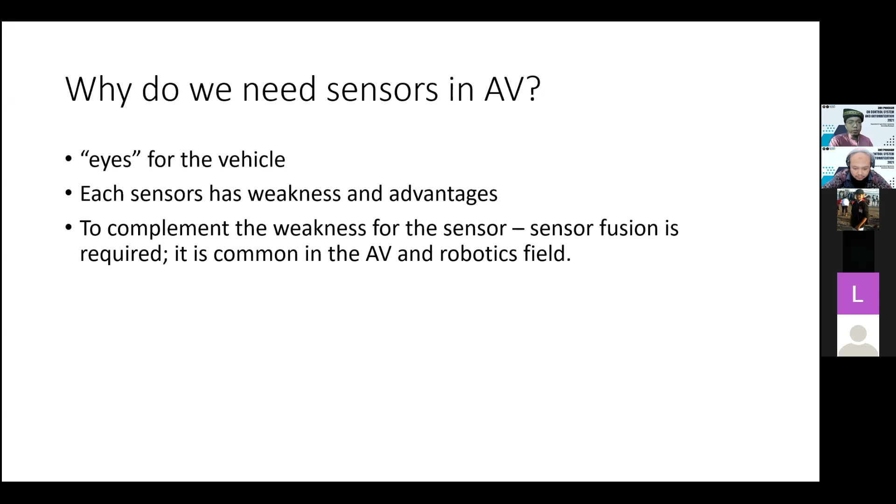So when we are developing our autonomous system, we try to understand the environment. And how we understand the environment is by sensing it with a sensor.

So normally in an autonomous system, we have three parts here. We have perception, we have planning, and we have control. So what is perception? Let me give you one example. Perception is like us humans, right? When we walk, we see through our eyes and we hear through our ears, right? So when we walk, the eyes and the ears try to get the information during walking. And this information is processed by our brain so that we know where we are, where we want to walk, and how we walk.

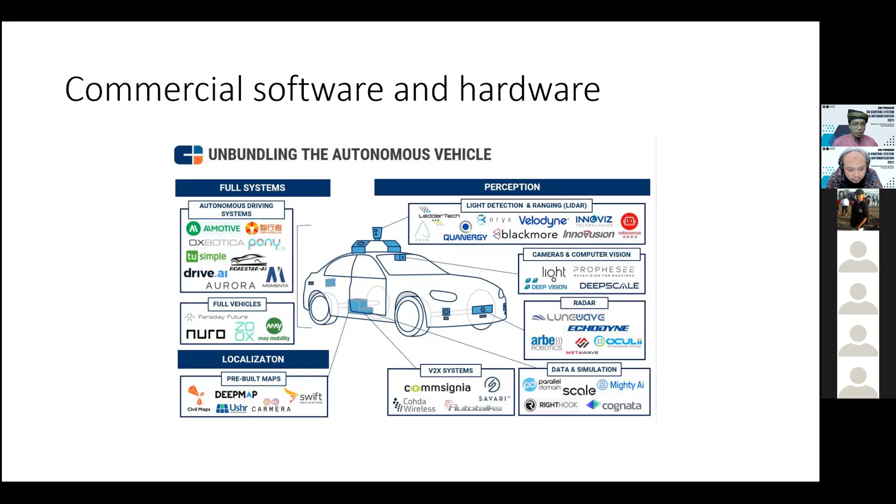And the second approach will be using open source. With open source software, you need to code a bit, you need to understand the coding a bit, but the advantage of open source software is that all the code is free and you can use the code development for your own application. And in fact, you can do commercialization. You can sell your product using open source software. So on the slide here, you can see some of the companies that are trying to sell the commercial software.

And we are going to talk about the sensors and how we use the sensors in our autonomous system. So we are going to talk about LiDAR later, camera, inertial measurement unit, what is the principle of the sensor, the odometer, the GPS, the Leddar, and the last thing is radar. And of course, there will be more sensors used, but these are the most common and mostly used when we want to convert our system into an autonomous vehicle system.

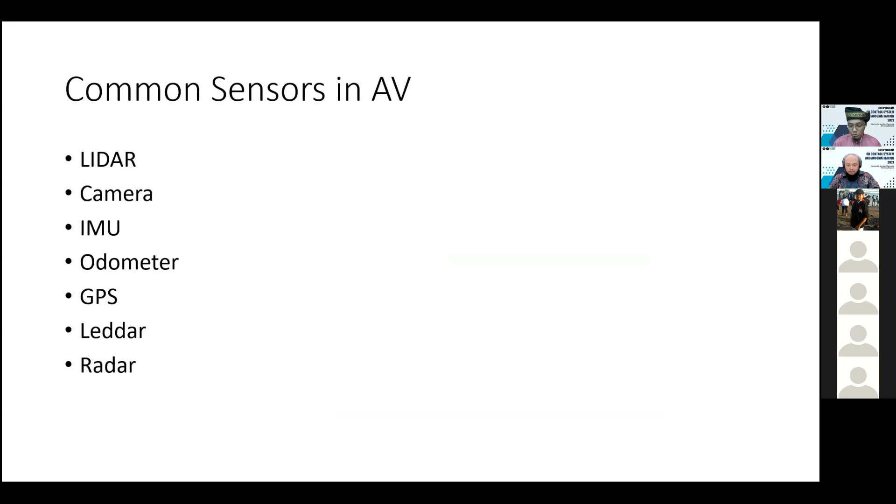So there are two types of LiDAR. We call it 2D LiDAR or 3D LiDAR, where the purpose of the LiDAR is to scan the environment and do the maps. We want to create the map of our environment. The term LiDAR originated from light and radar. That's why we call it LiDAR. LiDAR is commonly used to make high resolution maps. Its applications are surveying, geoinformatics, geography.

You can see laser guidance, and this is the real purpose of the LiDAR before we had autonomous systems. Normally they use it in surveying, for example, in agriculture to scan the topography of the area. And because of the ability of the LiDAR to detect the topography of the area, we utilize this technology in our control system and navigation for the autonomous vehicle.

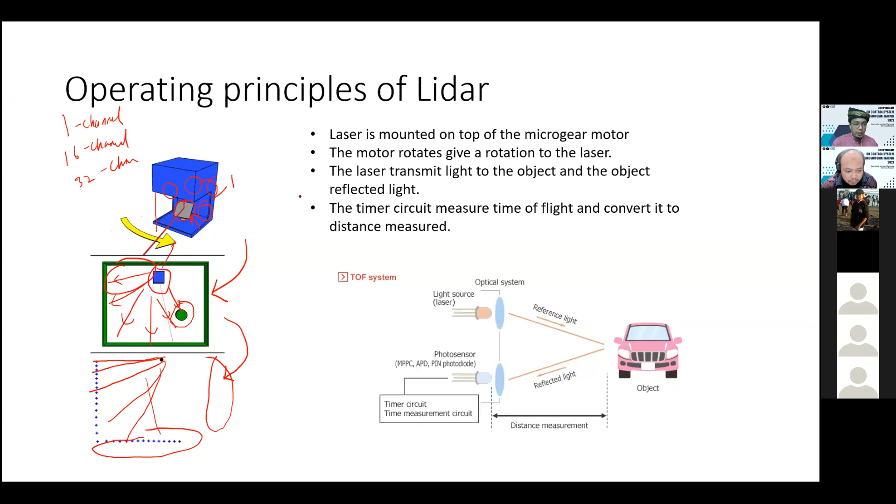Another example is the 3D LiDAR. The 3D LiDAR consists of multiple channels. Normally when we buy a 3D LiDAR, they have 16 channels, 32 channels, or 64 channels, and the highest one is 128 channels. So the higher the number of channels, the more information we can obtain from our sensor, and the more precise the 3D image we can create when we do a scan.

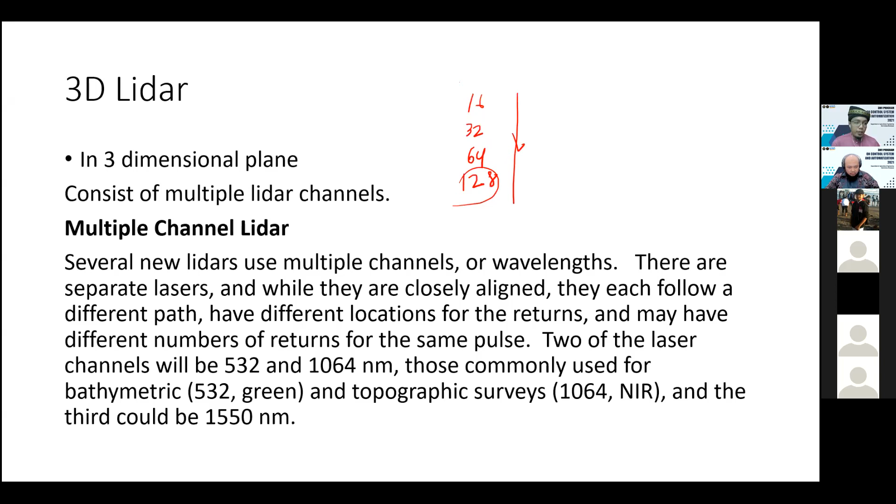And this is, for example, Velodyne, the most famous one in autonomous system development. This is a company from the US that makes 3D LiDAR. And when we have a 3D LiDAR, we can convert it into a 2D LiDAR reading.

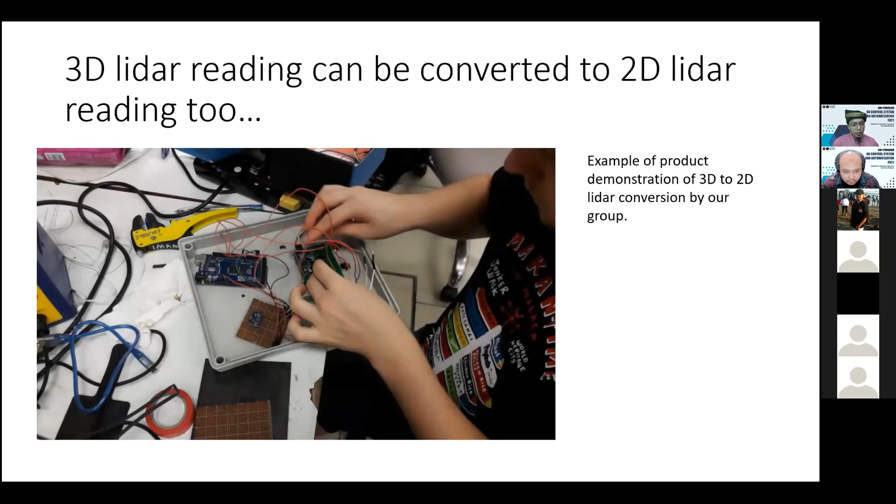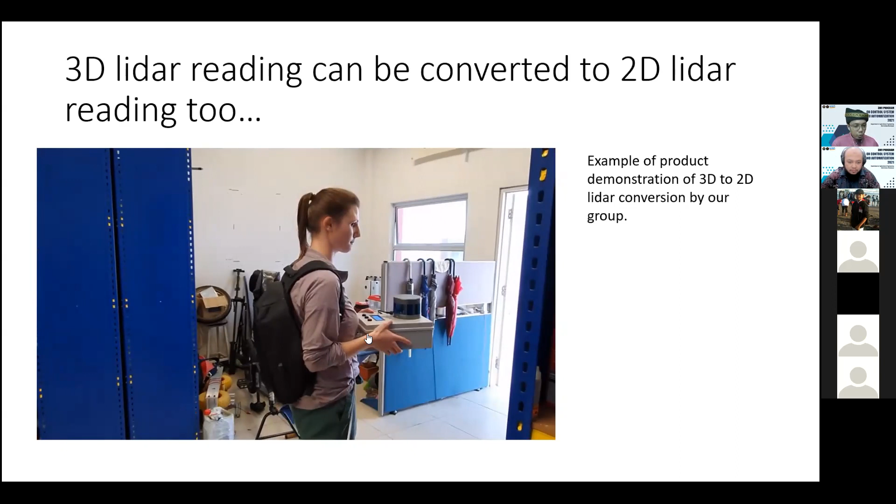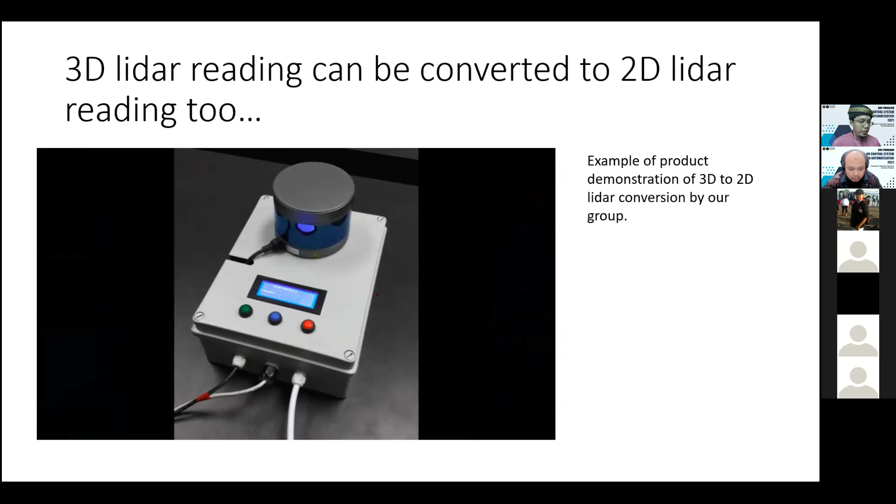So let me show you one of the examples inside my laboratory. We developed a 3D LiDAR application. You can see that the 3D LiDAR is here, and we put it into one small box. Our purpose is to use this 3D LiDAR and generate the 2D format.

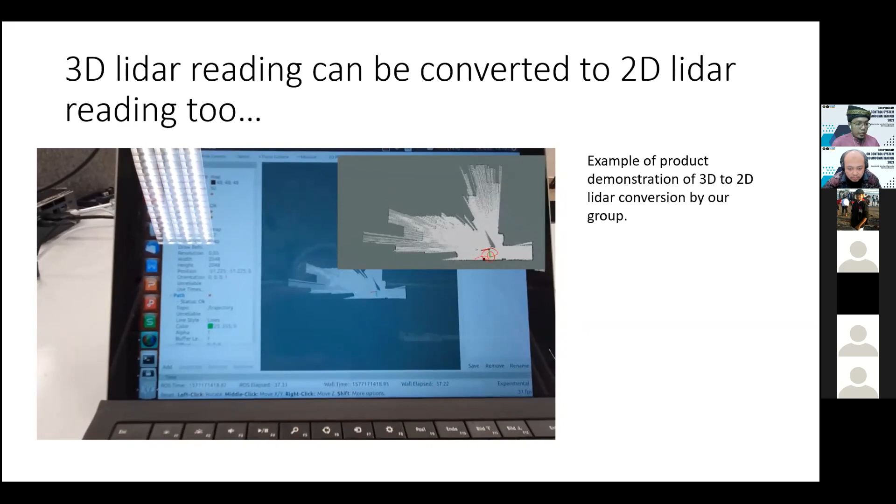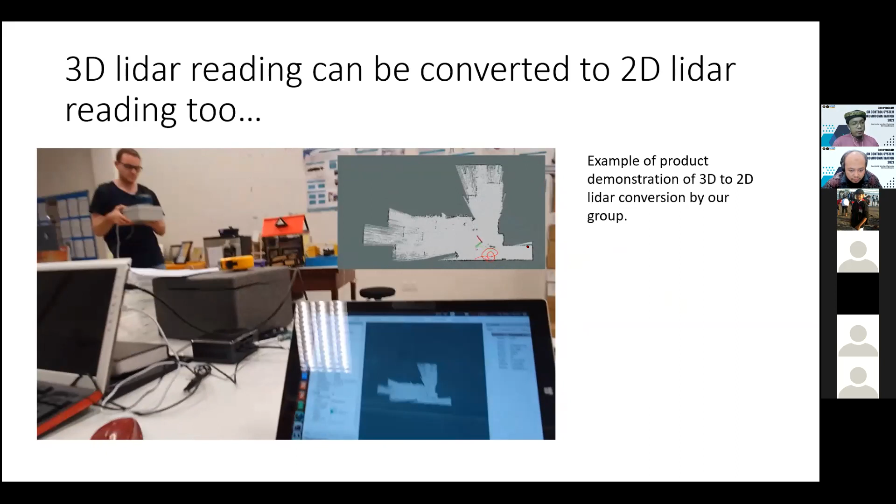So you can see from the video here, we can see on the map in gray color, whenever the person is walking, they can start to scan the environment and generate. We use our algorithm to generate a map of this environment. So we need to walk.

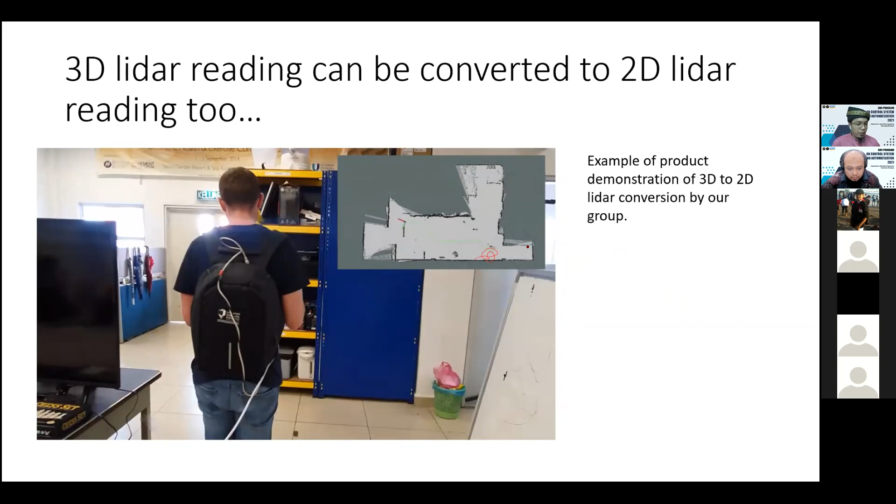So for example, if you see here, we are doing the map inside a building. This is inside our laboratory. When we do this scanning inside the laboratory, we can generate the map inside our building, because we know that inside a building, we cannot use a GPS sensor to generate maps.

So this is an advantage, whereby you don't have to do an actual measurement in order to generate a map. What we do is we just walk along the green trajectory. You can see it here, the green trajectory.

We just walk a short distance and you generate a complete map already. So this is the advantage if we have LiDAR. That's why LiDAR is being used a lot in autonomous systems.

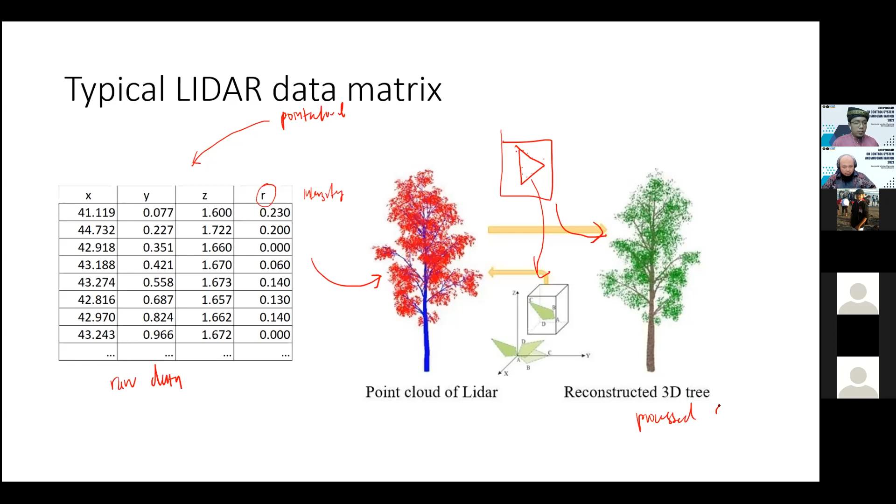So on the left side is the raw data, the information we get from the sensor, and the right side is the processed data. So this is what we get.

And when we have LiDAR, we also have a camera. The camera is one of the sensors that is mostly used in our autonomous vehicle system. Why? Because the camera is very cheap, right?

For example, you can see that the first version of the Tesla vehicle, the commercial autonomous vehicle in the US, didn't use LiDAR at all. They only used what we call a camera and GPS. So it saved a lot of cost because LiDAR is very expensive, and you can get a very cheap camera for less than $100.

You can get a very good camera, and then do image processing for object recognition. The concept of the digital camera is to use an array of millions of tiny light cavities, or photosites, to record an image.

So we have the image sensor. We get the light source here coming to our camera, and the camera traps the image, and this image data is logged into the digital circuit. Normally we have RGB layers, red, green, and blue layer, and we do the image processing.

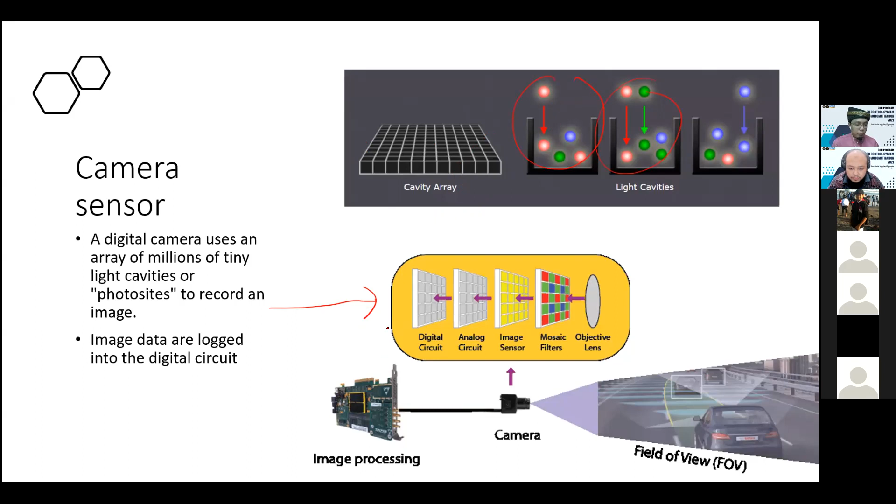Using a camera, we can apply machine learning and artificial intelligence techniques to recognize objects. For example, if we train our image data, we can use it to track motion, such as human motion. When we can do this, we are able to track the image.

So that we can run the control system. For example, if we track a human using a camera sensor, you can stop your vehicle by giving the actuator or throttle command a 0 value so that your robot stops. This is an example of the camera sensor.

Also using a camera, this is widely used in the world right now for image classification. So using a camera, for example, for agriculture, you can detect the plants or trees, or the fruit maturity.

Using image processing, when your vehicle approaches the fruit, you can recognize it and instruct whether your vehicle should go and pick up that fruit or not, using image classification. So this is using a machine learning technique.

If you understand Python, we have machine learning toolboxes like TensorFlow, which you can install using Anaconda. This technique is very useful if you want to develop an intelligent application for the robot you want to build.

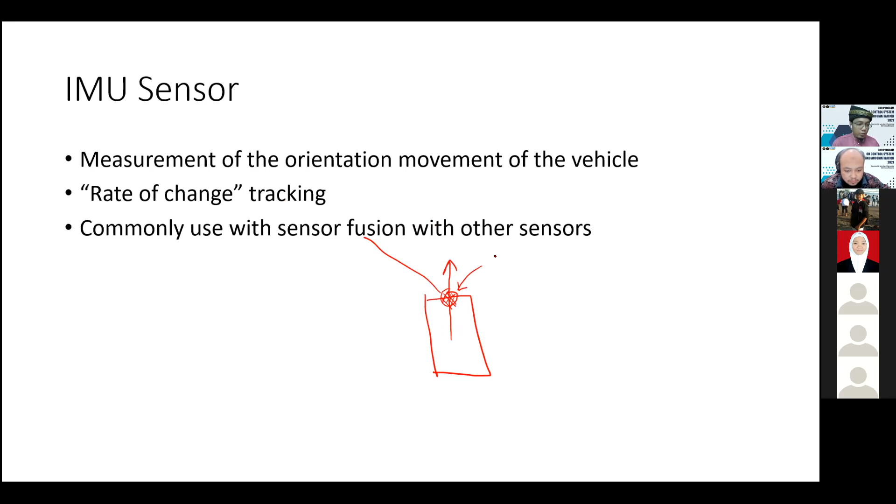Normally in a mobile robot, we try to move forward, and that's why most sensors like LiDAR and the camera are placed in front of the vehicle, because having a sensor in front gives you a very good field of view for scanning.

However, when we want to predict the motion, we want to know how much our vehicle rotates. For example, if I give some steering value to my tire, I want to know what the rotation per second will be - for example, in 1 second, how many degrees my vehicle rotates. Maybe in 1 second my vehicle rotates 1 degree.

So I can predict in 3 seconds where the heading of my vehicle will be. This rate of orientation we call rate of change tracking, meaning you can measure the rate of change in 3 axes: X, Y, Z. When we have this rate of change, we can fuse it with other sensors to detect the overall movement of our vehicle.

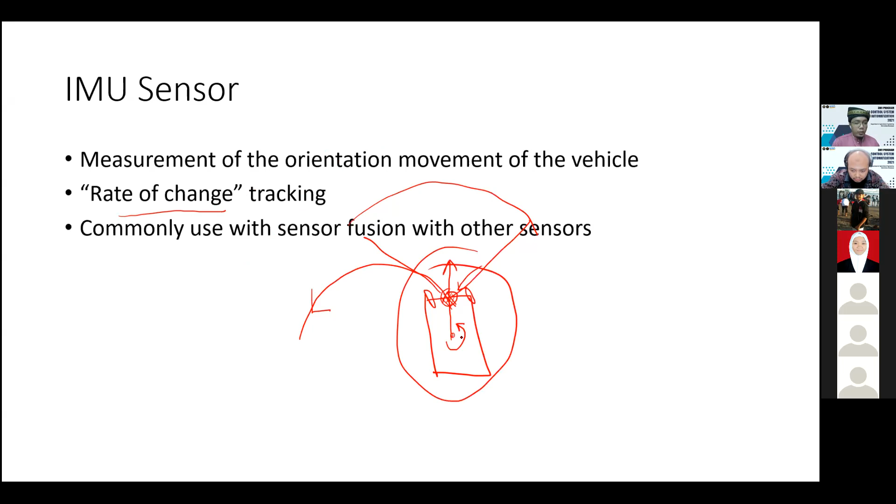This is an example with the IMU sensor installed. If we install the IMU sensor, you can see this is your Z-axis. Normally on the Z-axis we measure the yaw, and on the X-axis we measure the roll axis, which rotates left and right. On the Y-axis you measure the pitch axis of your system.

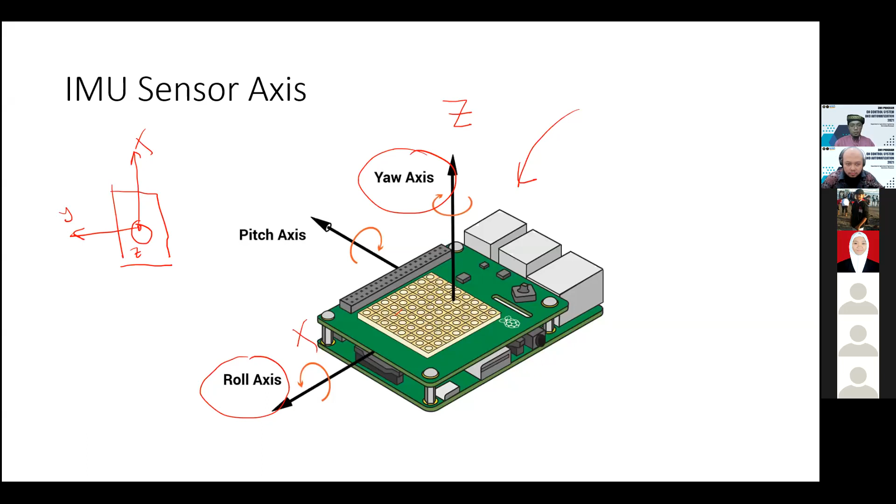Normally when we put our robot here, the Z-axis is pointing outward from the screen, this is your X-axis, and this is your Y-axis, with the Z-axis pointing outward from the screen. This is how we place the sensor in our robotic system.

This shows how we position the IMU sensor. Normally we place the IMU sensor in the middle of the vehicle, or between the two rotating tires. For example, with a left and right tire and your drive here, sometimes we put the IMU sensor at this location, or at this location. The placement of the IMU sensor is very important, because calculations depend on where we put it, so we can calculate the rate of change at different positions. Normally we put it at the center.

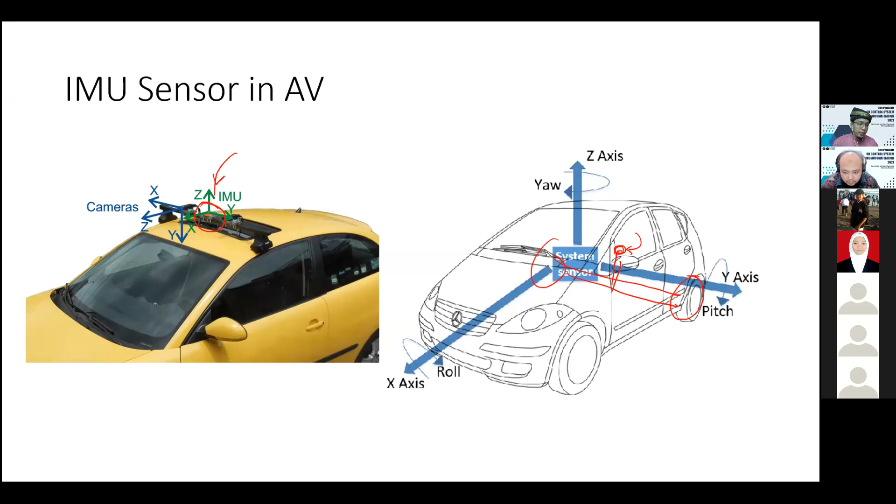And when we put IMU, we can use it for tracking motion detection. For example, using a drone motion, you can have some prediction of the motion involved inside your system.

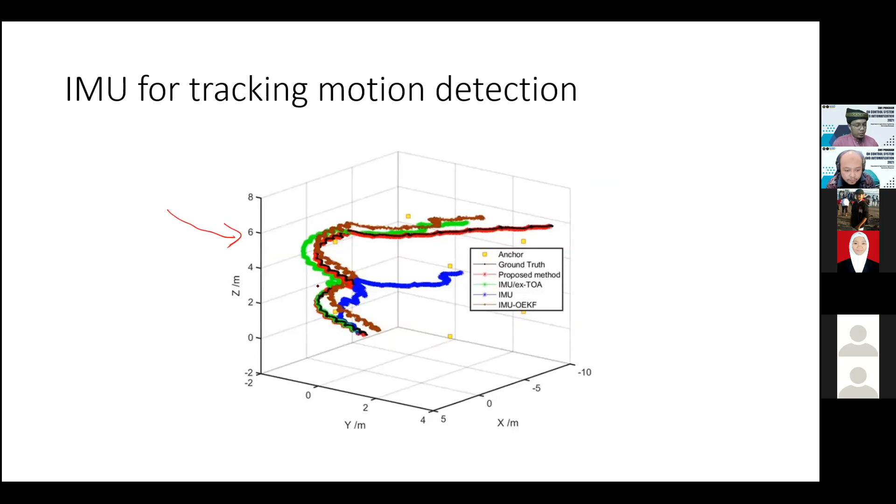And the next sensor is the odometer. The odometer sensor is like IMU, we call it an inertial navigation sensor. It's used to track the trajectory and the distance traveled of the vehicle.

Like the autonomous vehicle, we have IMU at the center. The rate of change of the orientation is measured by the IMU. When you have a rate of change, it means our robot can be detected whether it turns right or left. But normally the IMU is not precise if you want to track for a longer distance of motion.

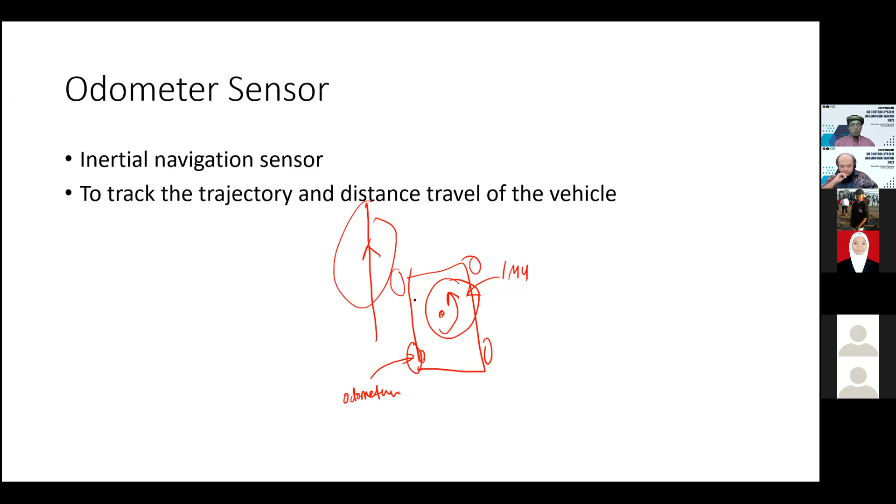That's why whenever we have a tire here, we will install the odometer inside here. So whenever our tire rotates, you can predict the translational motion. When we combine the translational motion and the orientation motion, you can generate or predict where your vehicle is moving.

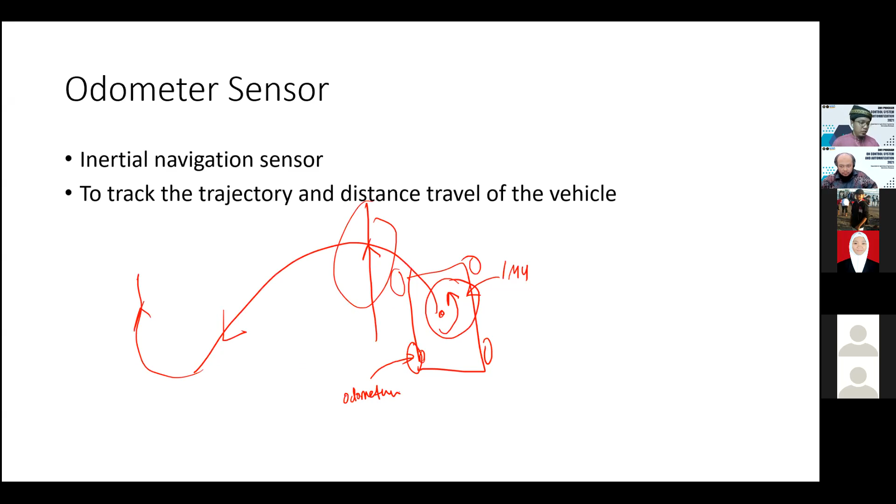That's why we call sensor fusion very important in the autonomous mobile robot. That's why we use a lot of sensors in order to get where our vehicle is moving. When we combine these, we can fuse with other sensors to create the motion here.

For example, you can see the black line here is the reference. The reference is that we want to follow this line. This is our robot. So when we use the IMU and odometer, we can plot the red color one.

This red color can be plotted using the IMU and odometer, so that you know we want to go to the black line, but our current line is on the red. And we can calculate what is the error between the red line and the black line.

And if we have good tracking, you can see here that the red color line and the black color line are very close. So what we can say is the smaller the deviation between the black and red color line, the higher the accuracy of our robot to follow our trajectory.

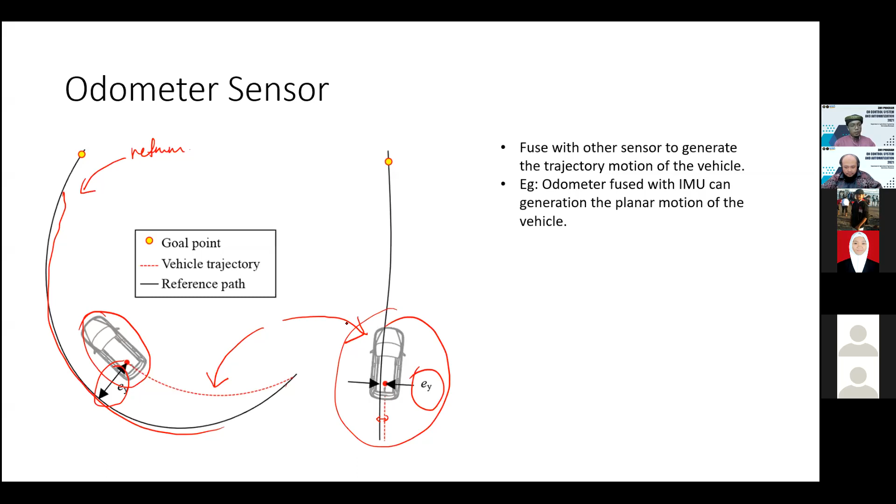That is why we need the trajectory information of our vehicle, so we can compare where we want to go. If we have a smaller error here, it means we are on a good track, so your vehicle is currently following the path that you want your robot to go. This is important because we want to make sure we are following our path.

And the next one is the GPS sensor, global positioning system. This is to get a global localization sensor. So if you see from the previous slide, in order to get the X and Y position in our coordinate, we fuse between IMU plus odometer.

We fuse between the IMU plus odometer to get the XY coordinate of our robot. For GPS, if you don't fuse with any IMU odometer, you still be able to get the X and Y coordinate. That's why we call the GPS a global localization sensor.

So the advantage of the GPS sensor is that GPS does not have biasing error. We will discuss later what is the biasing error compared to the inertial measurement unit. This sensor has some noise, which we will see later. GPS does not have this noise.

However, the GPS is very sensitive to the environment, because the way GPS communicates is via satellite triangulation to get the location of X and Y. And if the triangulation is not accurate, for example during a measurement at certain locations where you don't have a good satellite number, the triangulation is not accurate. So we will have very low accuracy of our sensor.

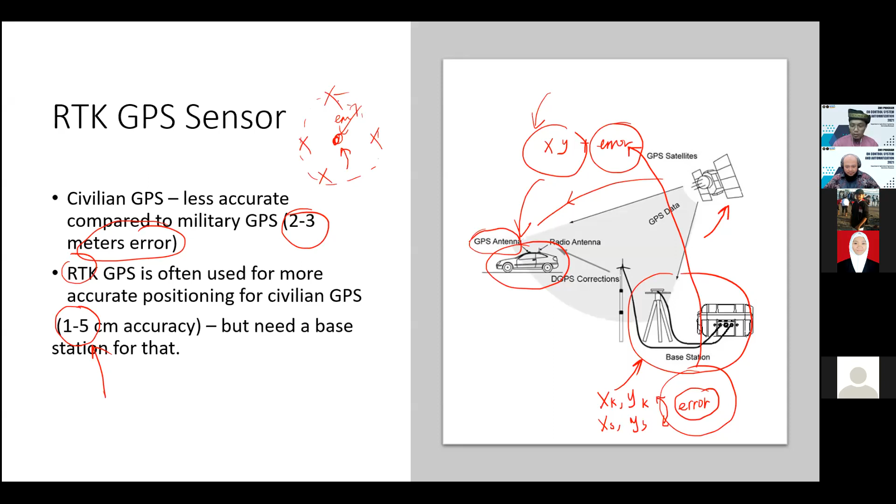So for certain applications, for a known environment in a certain place, we can use RTK GPS because our robot is navigating within that area only. But if you want your robot to cover a very dynamic location, a very random location, we cannot rely on RTK GPS. So there are pros and cons depending on your application.

And the next sensor is the radar sensor, which we use for obstacle or movement detection. A radar sensor is a very fast sensor. It keeps scanning, and radar sensors are categorized based on frequency. So we have high frequency radar and low frequency radar, and we put the radar on our vehicle at a certain angle so that it is used to detect the blind spot and objects passing through, so that we can do appropriate control for our system.

So this is some of the autonomous vehicle technology with LiDAR. They still use the same laser transmission, but with a small form factor, and they can do a scanning. So normally we will use a LiDAR for scanning in a very short distance. Okay, so right now we have been through the basics on the sensors that are being used a lot in the environment.

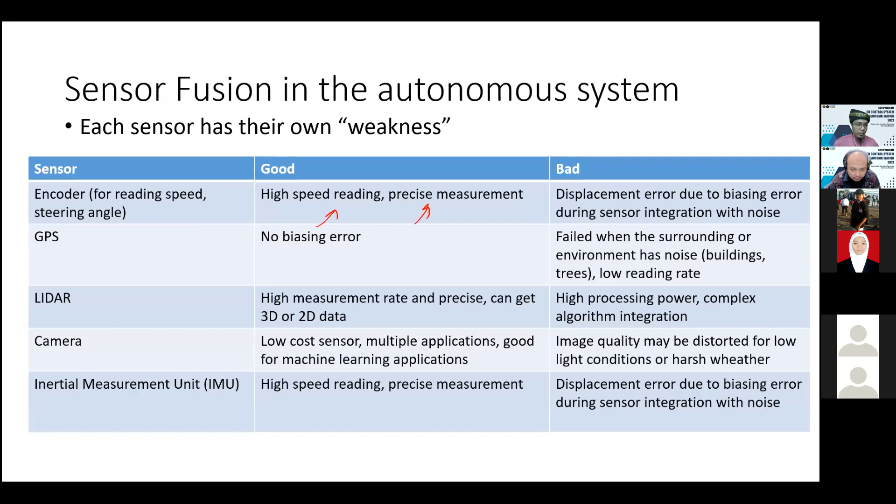For example, you're just going to use it during the daytime only. So maybe you just need a camera and several sensors only. Or we only need it on a small scale only, so we don't need to use GPS. Relying on our encoder is also enough. So it depends on your application, and then the application will determine how you configure the architecture of your autonomous system.

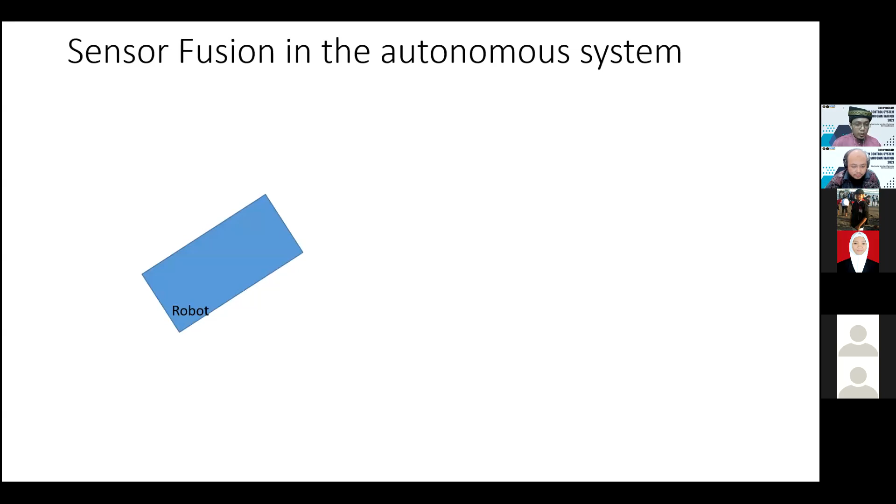So next, I'm going to introduce a basic overview of sensor fusion in the autonomous system. So what is sensor fusion? For example, this is your robot, right? When we want to track our robot, this is actually your actual robot location. This is the location of our robot that we see with our eyes. But when we sense it via sensor, we don't really get this location.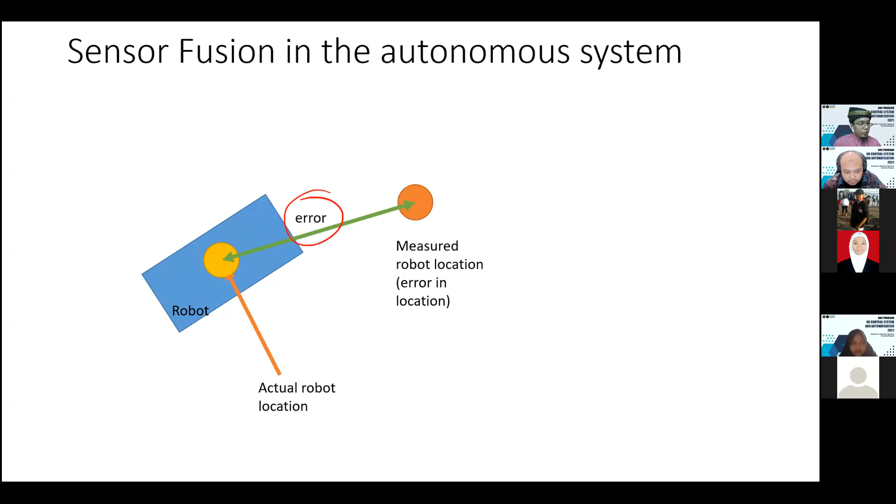We get another location. So the difference between the location that we get from our sensor and our robot, we can say that we have error over here, right? Sometimes when we get raw data from our sensor, the error is very high. That's why we need to fuse the sensor using information from other sensors to verify the actual location so that we can do a correction.

So the process of using multiple sensors is called sensor fusion, whereby the objective is trying to achieve a corrected measurement. So this is our initial sensor that we measured.

This is our actual robot location. And this is the actual location after we do a sensor fusion technique. And we can see that although there will be error, the error is reduced and as close as possible to the actual robot's location. So this is the purpose of why we want to use sensor fusion for our robot.

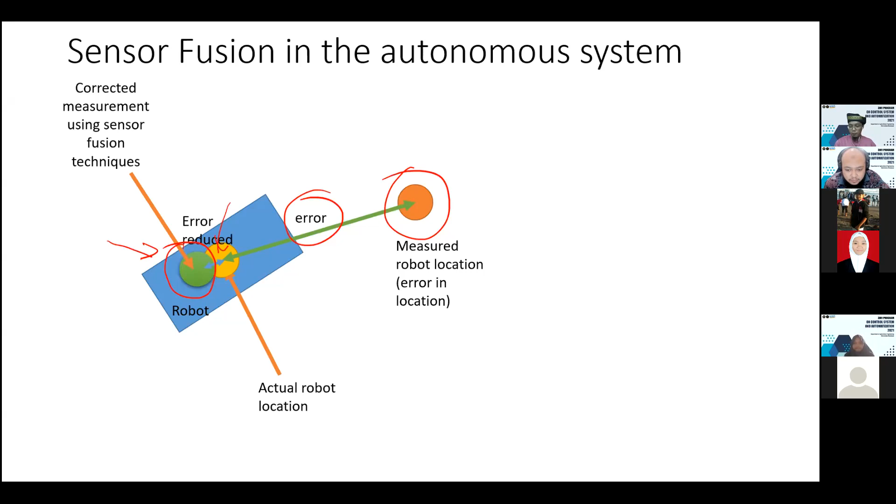For example, if we read the encoder speed, normally we get a theta dot. Theta dot is our encoder speed. When we want to get how far our robot has traveled, the displacement data, we can do the integration. So you do the integration in your programming, where you get the total displacement plus noise. So this is the error.

If we repeat the same loop every time we do the integration to get the displacement data, you can see that the noise will keep adding. We keep adding noise every iteration. So the value of noise here will become larger. This noise we call a biasing error. If we plot it over time, your noise will rise exponentially.

So that's why with an encoder, odometer, or IMU, for example, if our robot is trying to navigate in a perfect circle, when we measure by sensor you don't get a perfect circle, you get something like this because of the noise from your sensor reading. So we want to correct this noise by using sensor fusion.

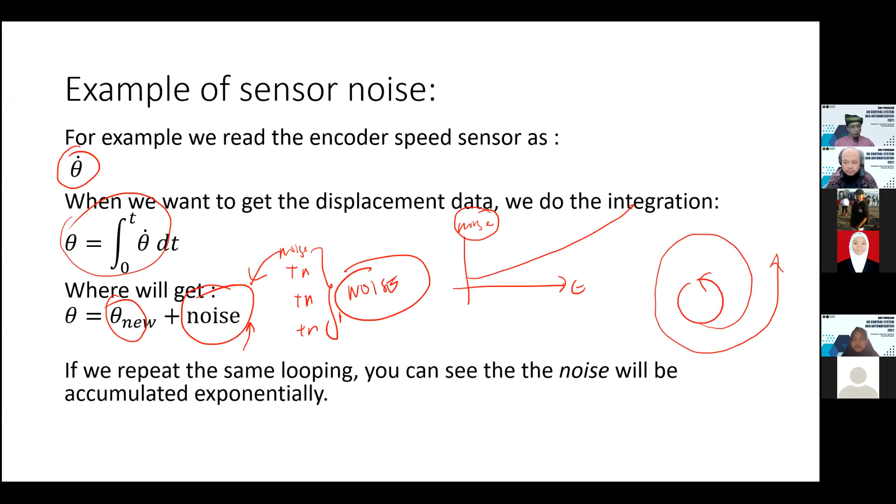Okay, so I'll show you an example of how we do sensor fusion in my lab. We use this small mobile robot, which has an odometer. We have an encoder or odometer sensor on the left and right tires. And we don't use a camera, we use an ultrasonic sensor. You can see the ultrasonic reading over here. So we use two sensors.

The odometer is an inertial-based sensor, meaning it has a biasing error, and the ultrasonic sensor is a non-inertial-based sensor. We use it like a radar sensor to get a distance. The way we do sensor fusion is we try to find a landmark, so that when we get a landmark, we provide a correction to our odometer reading.

In this stage, we use a technique called the Kalman filter. It's an algorithm implementation for sensor fusion. I don't want to go into detail here, but I'll give you an overview. It has two stages, predict and update, where in the predict stage we use the kinematics of the robot to predict the state estimate of our robot.

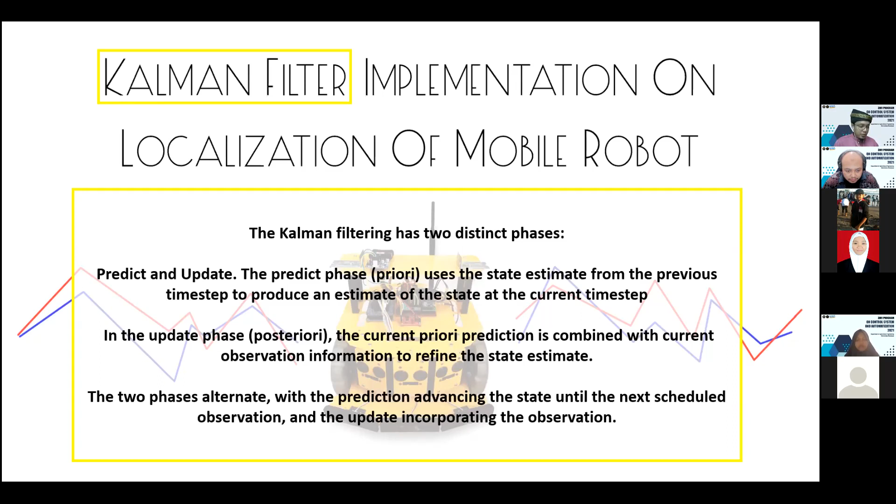We try to predict where the next state will be, and then update it. In the update, we compare what we predict and what we measure from the sensor. Using this error, we correct our robot's location. There are equations, but I won't cover them because they're quite detailed. But this is how we do it: two alternating phases, predict, update, predict, update, until you get a very precise localization from the sensor data.

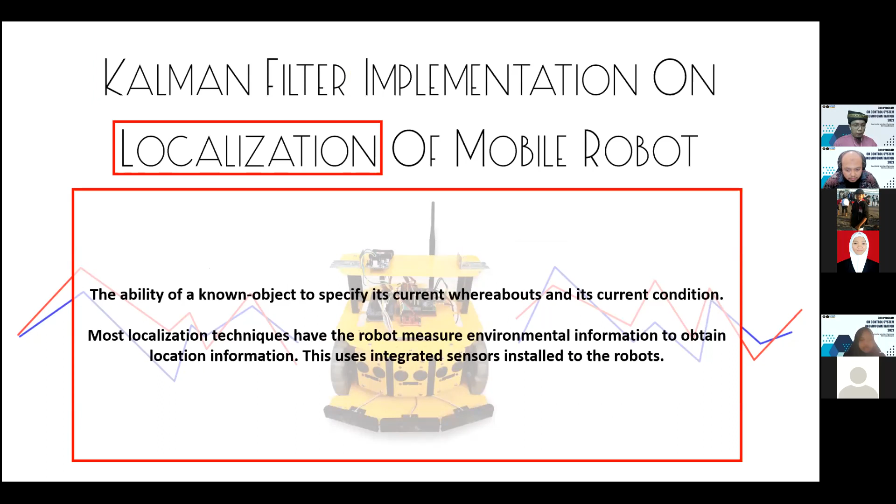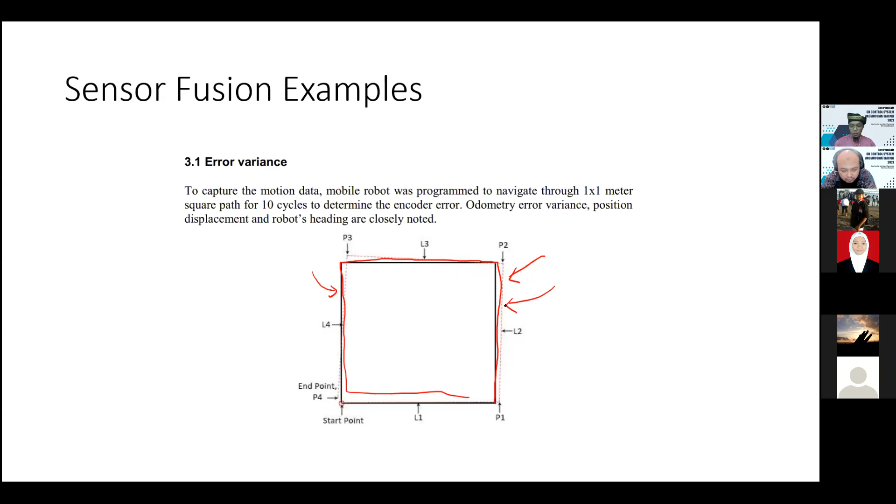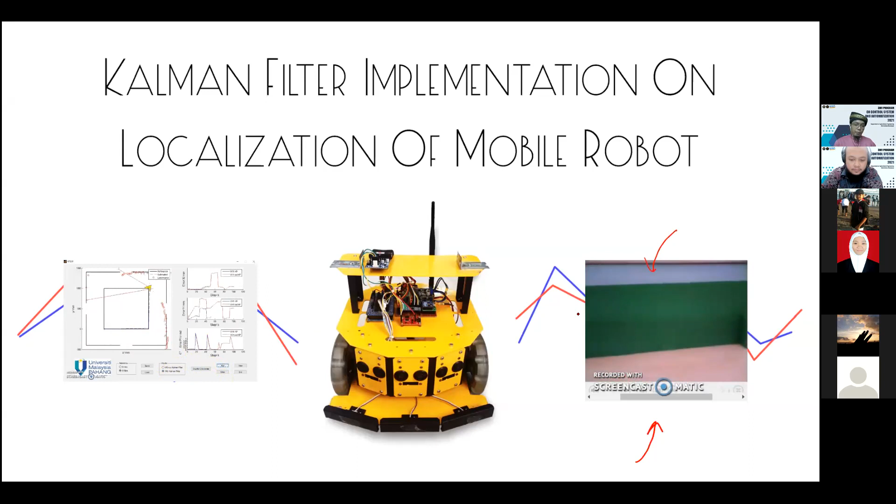How we do it: you can see on the right camera here, we move our robot manually in a perfect square. The green, or black, here is our landmark. We use this landmark to measure our distance from it using the ultrasonic sensor. And we compare what the error is if we don't do sensor fusion, and what happens if we have sensor fusion. So this is the example.

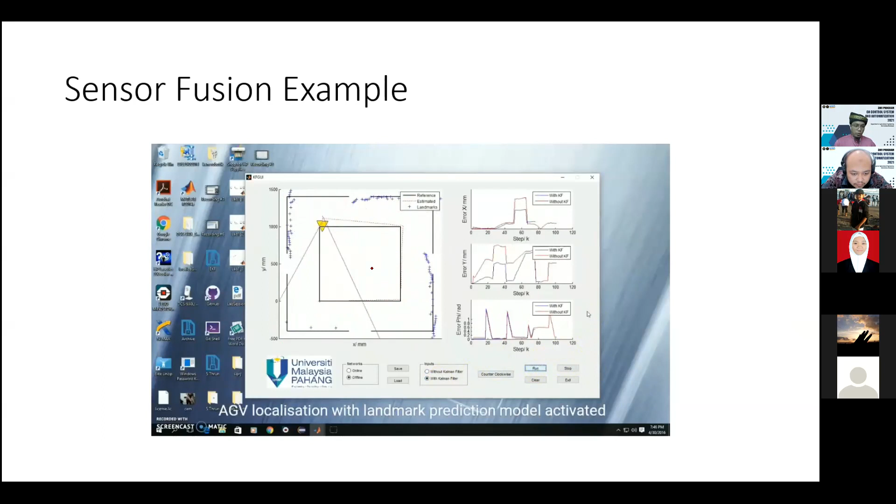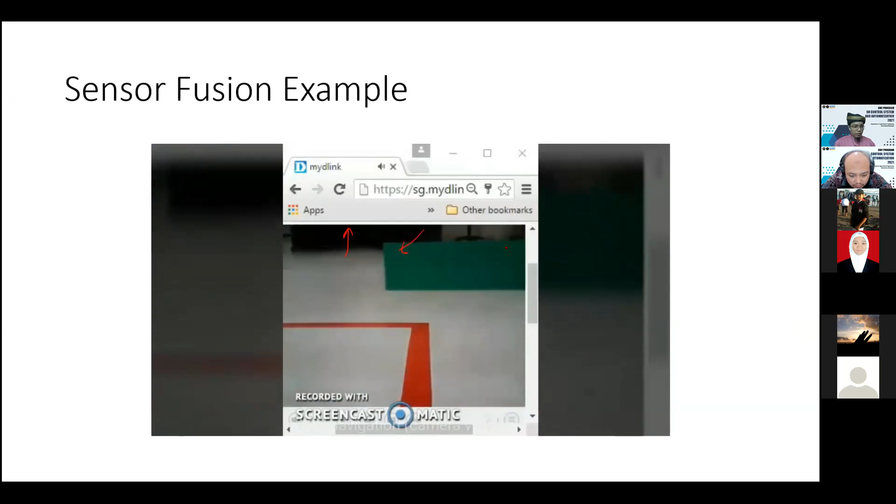So this is the camera view that we have for our robot. So this is the sensor fusion example for our robot.

So any question before we proceed to the next topic? Is there any question? You can ask directly. I see no question in chat. Okay, no question in chat. One question from chat. Okay.

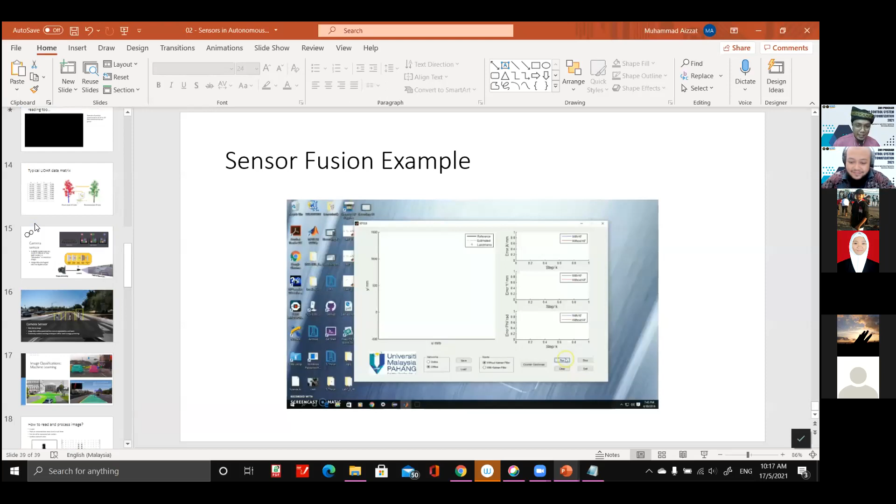From Andika Ananda: I'd like to ask something about the LiDAR itself. How could it read back and receive the data from the laser that is being transmitted? Does it have the same system that is used in a sonar, or is it way different? Time of flight, maybe. Okay, let me open this slide first. Thank you for the question, Andika.

So the principle of LiDAR is we use light reflection, whereas in sonar you use ultrasonic reflection. In sonar you use wave transmission: we transmit the wave and the wave reflects back. But for the LiDAR we use one single light source, and this single light is reflected back to what we call a photosensor. So one is using light, one is using wave. These are two different working principles.

That's why using a LiDAR you can achieve point-based accuracy. Because with every light you have a very precise point compared to the sonar. Sonar is like a wave, which gives a general estimate of the distance. With LiDAR, at every degree of angle you can have every point. So this is the difference between the LiDAR and the sonar. I hope that I answered your question.

Okay, thank you Andika Ananda for the question, and Dr. Aizzat. Okay. Is there any other question? You can ask directly. If there's no question, I want to ask some question, actually.

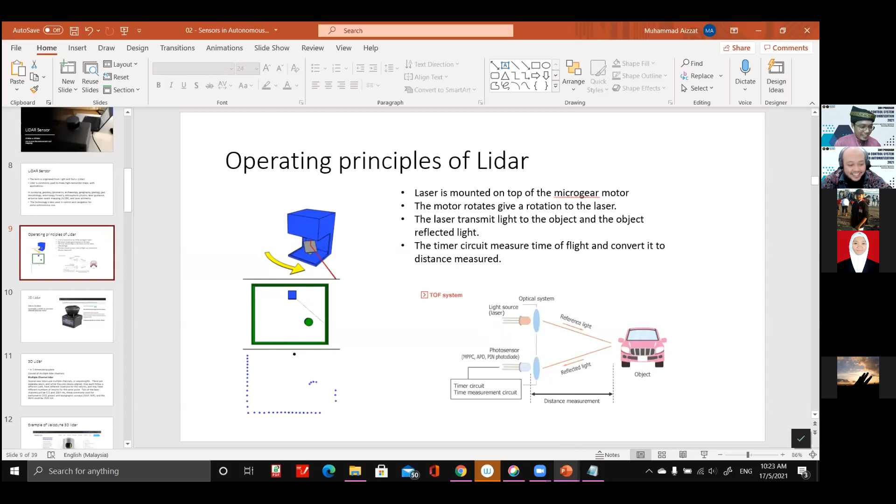I see. Thank you very much, Doctor. I hope that we here can purchase LiDAR soon, so we can try by ourselves. Yeah. You can try it first.

Thank you. Okay. So maybe I will share some case study after the sensor. How do we use our sensor? Okay, in this case study, in the previous lecture you saw that we developed the sensor from a golf cart, right? And then until we developed using our actual car, for example, a Proton car. In this slide, I'm going to share my current research development in UMP.

We try to develop another project which is called Smart Campus Autonomous Vehicle, or the short name is SCAV. In my lab, we call it Autonomous Vehicle Laboratory. In this slide, I'm going to share some of the sensors that we use and some of the development phases that we experienced. Maybe not everything is sweet, right? We have some failures also. So we are going to share this one. So maybe from your side, Dr. Dimas, you can utilize our experience and share with your students so that we can have a good collaboration in the future. So this is the slide on how we start.

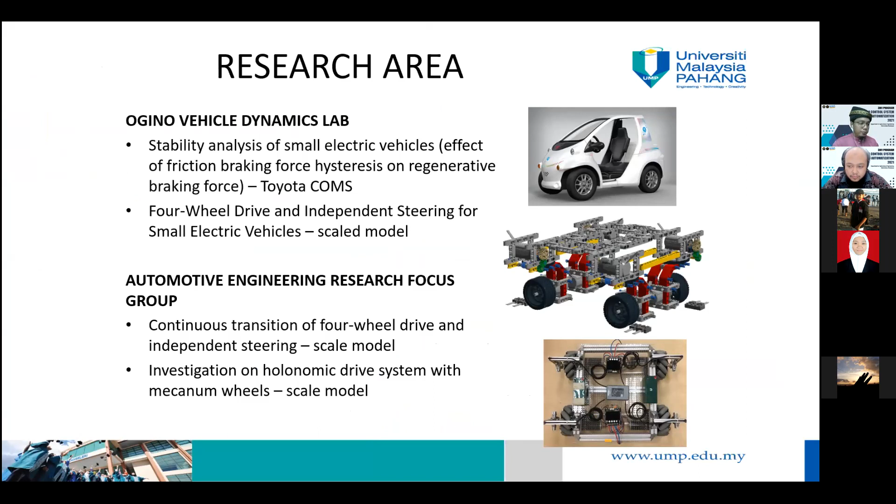The reason I'm telling you this is that when we want to develop this kind of project, we need to have a good team composition, because a very large project is not just one single field. We will have multiple fields. Maybe we need experts in mechanical, programming, image processing. But everyone needs to understand the general architecture of the autonomous system, like I showed in the first slide, so that everyone understands their own role when we do the sensor integration.

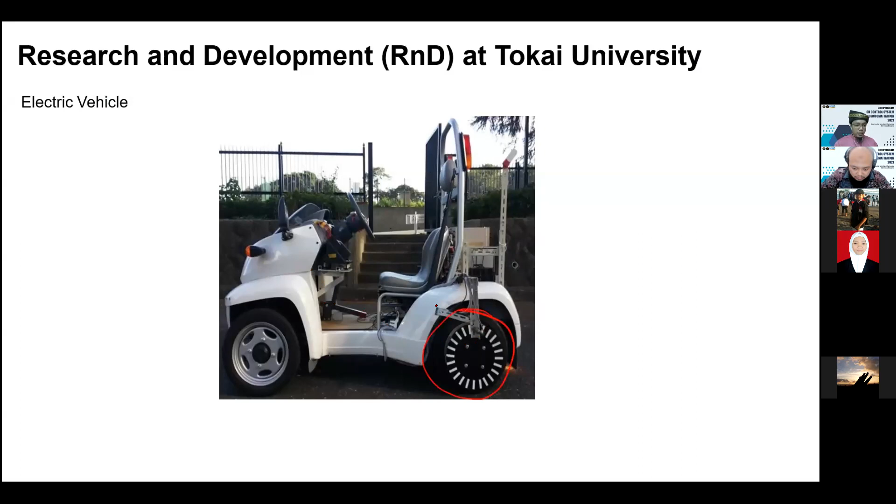So this is some history on how we started. When we wanted to start this bus development, we started with small things first. My previous researcher, Dr. Hewan from Japan, developed a golf cart. We installed the golf cart with, for example, an odometer here and some electric vehicle sensors. And also we did a lot of benchmarking. We went to some industry. I went myself to the autonomous vehicle test track of Volvo in Sweden. They call it AstaZero. This is the first autonomous vehicle testing track in the world.

So here you can see there is a dummy building, and this is an autonomous truck being passed through to see the junction. This is the autonomous Volvo here in development.

I did test it, I became a passenger to test some of the latest technology. It's a very good experience, and they have a junction with some dummy kind of thing to check the intelligent monitoring system.

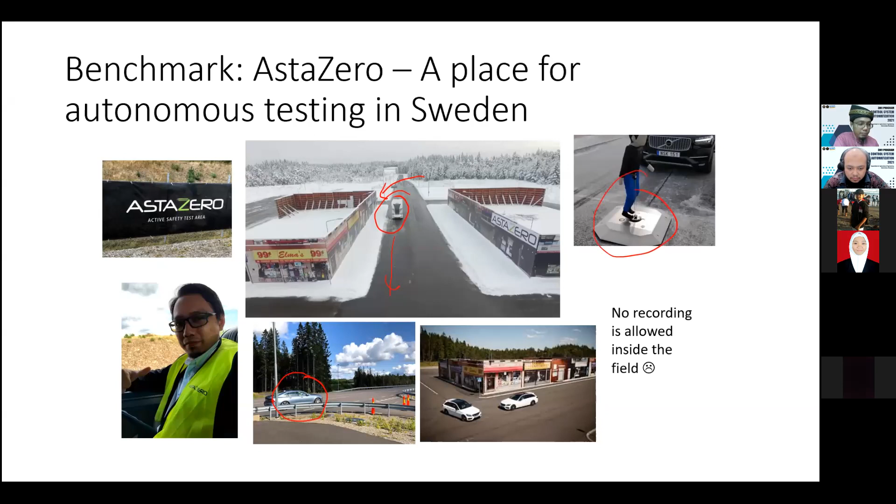We went to Sweden for benchmarking. Some of this autonomous platform is being developed by a French company, and they deploy it for awareness at Sweden's Chalmers University campus. It's like a very compact shuttle.

You can go inside the shuttle, and there will be one AV engineer inside just to set up the systems. Then you can try it for free for navigation around the campus, so you see a nice experience where you see how the autonomous vehicle works.

We can see that they are more advanced because, of course, they have plenty of budget. When we want to develop this kind of project, it involves a lot of money, so if we have a lot of money, I think we can do the same. They are sponsored a lot by very big automotive companies like Volvo, Volkswagen in Europe, so that's why they have a lot of funding. I'm quite impressed when I went there compared to our country, we have a very limited budget.

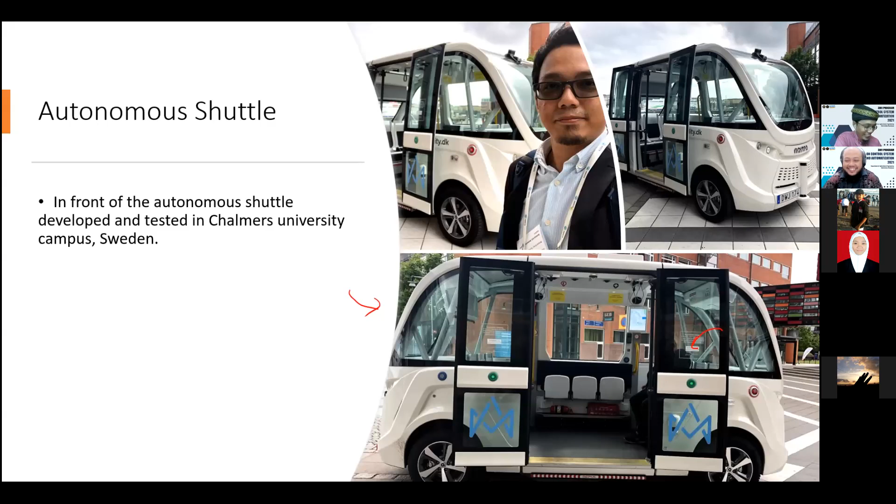He is one of the principal researchers responsible for developing this kind of algorithm for the autonomous vehicle. You can see they have a very sleek profile, very sleek manufacturing, of course again because of the budget. It's very good to know that we have a representative from an ASEAN country involved in this very big project, and we have collaborated to produce some books and papers in the autonomous vehicle field.

In 2015, me and my friends started with AV development. Of course, we started with a small platform first, so as I shared previously at the PhD level, I also started with RC car. RC car or drone is a good platform for students to start because it's not that expensive, I think your university can fund it.

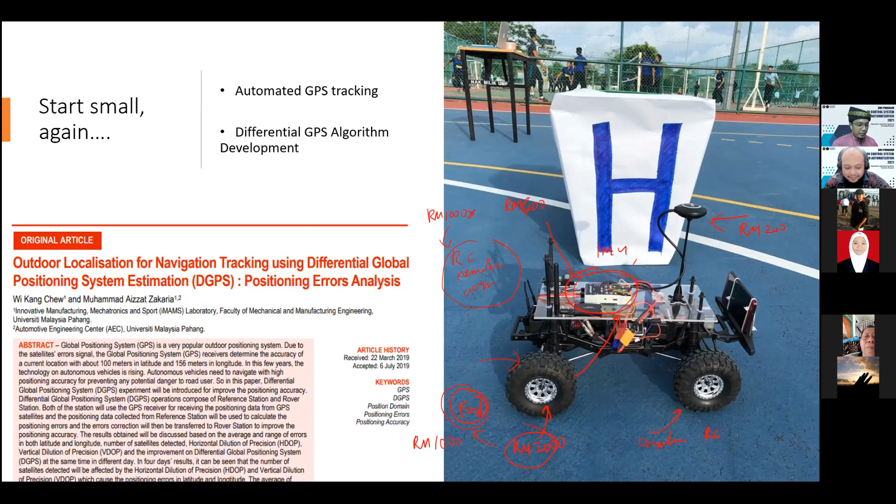So that's why we use this crawler for testing. In fact, you can put a very cheap, low cost setup, or you can just use a Raspberry Pi if you want to do some image processing. This is just an example of how to start cheap.

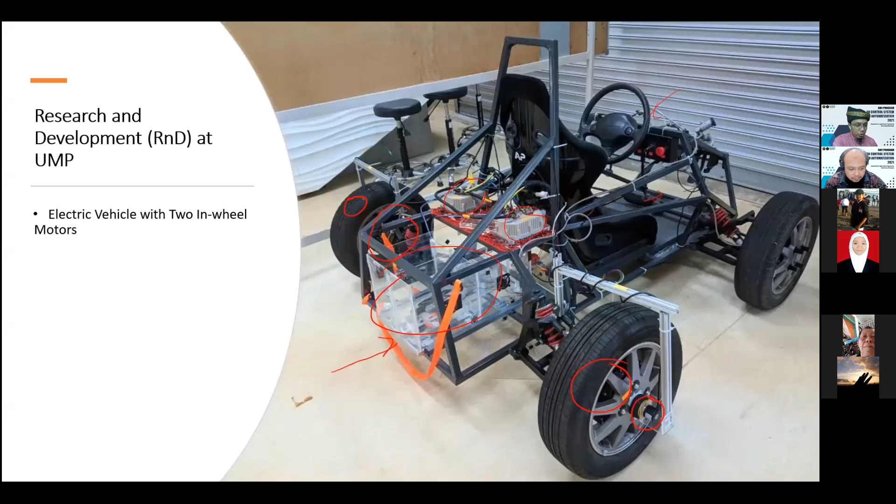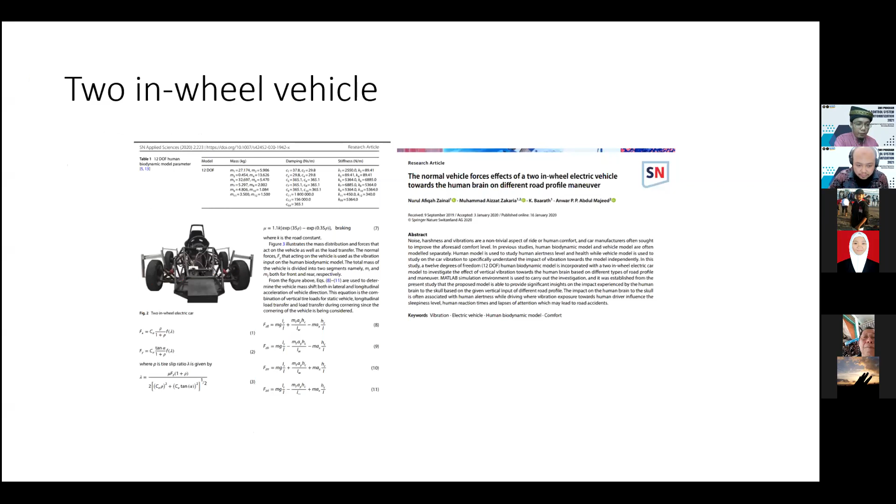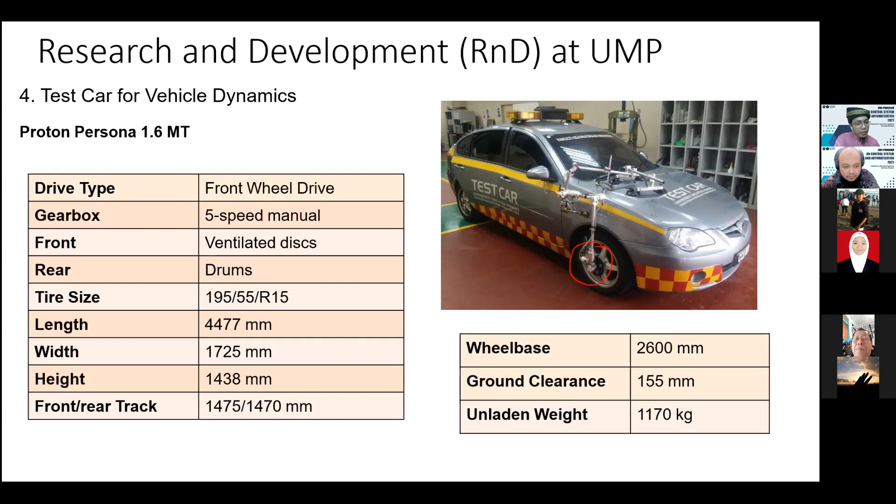So we developed this for our research and published some papers. We have some mathematical modeling where we verify it, and we also developed a test car inside our university using a Proton Persona platform, where we put some sensors inside. We have some instrumentation, but the difference is we don't put a motor as the actuator to control it - this is more of a data logger only, used to measure, estimate, and see the dynamic characteristics of our vehicle.

And this is also a cheap cost option if you want to develop it yourself.

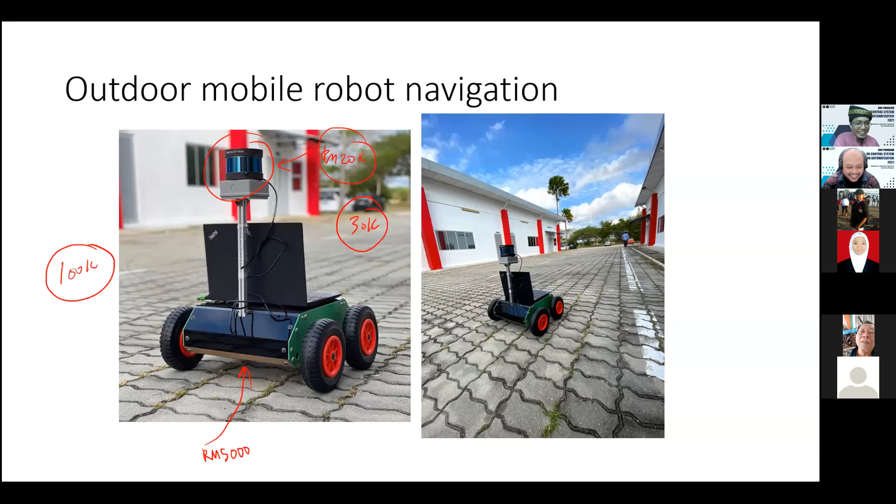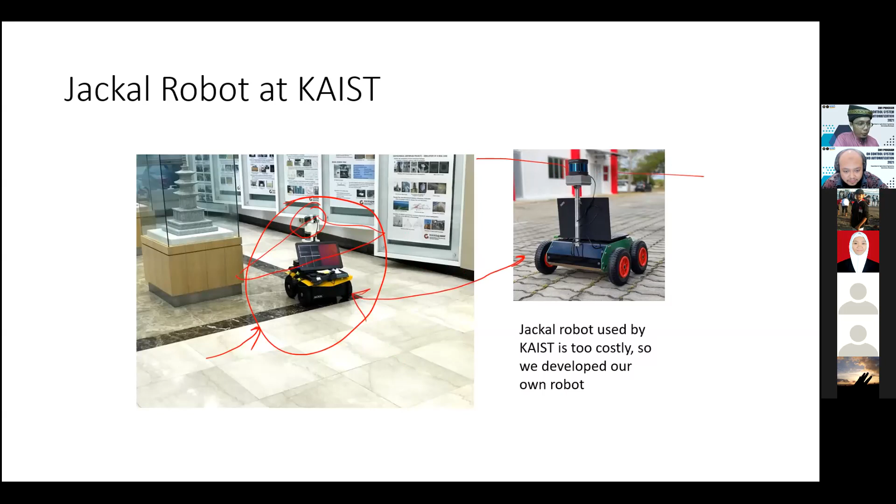This is some sharing on Sweden, where they have a very complete solution at their campus. The landscape already implements EV architecture, compared to our country where we rely a lot on petroleum - our profit comes from, for example in Malaysia, Petronas, like Dr. Dimas who also studied at Petronas. So we rely a lot on normal gasoline fuel, that's why we have much less electric infrastructure in Malaysia.

But in Europe they're already matured. That's why when EVs are already almost everywhere, they accelerate towards autonomous systems. You can see inside the university there are logos showing industry support from very big companies. So they have funding not only from government but also from industry. In fact when we went to our conference in Sweden, the major sponsor was Volvo.

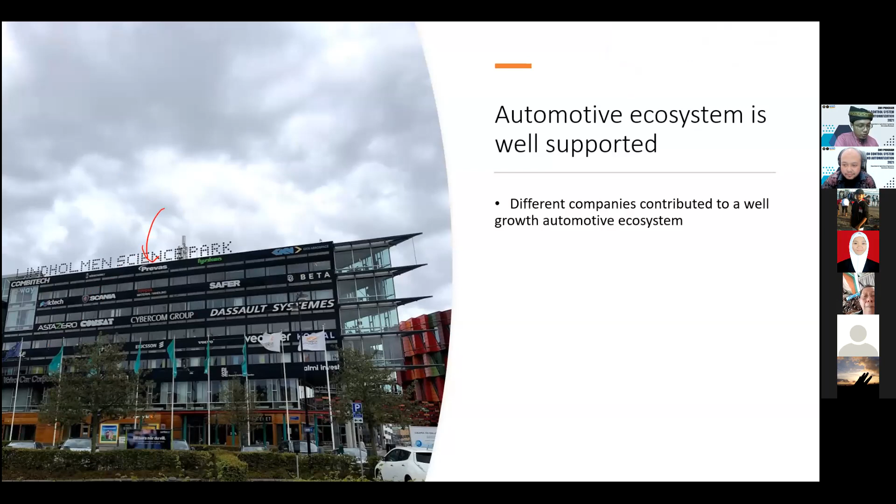In our ASEAN region, our participation in autonomous vehicles is very small. For example in this Europe conference, only me presenting from Malaysia. I hope Dr. Dimas can venture into Indonesia so we can create Indonesian participation there, so we can collaborate on creating an ASEAN region conference for this topic. We are very small - this is the truth, we as ASEAN have to collaborate more to expedite our technology.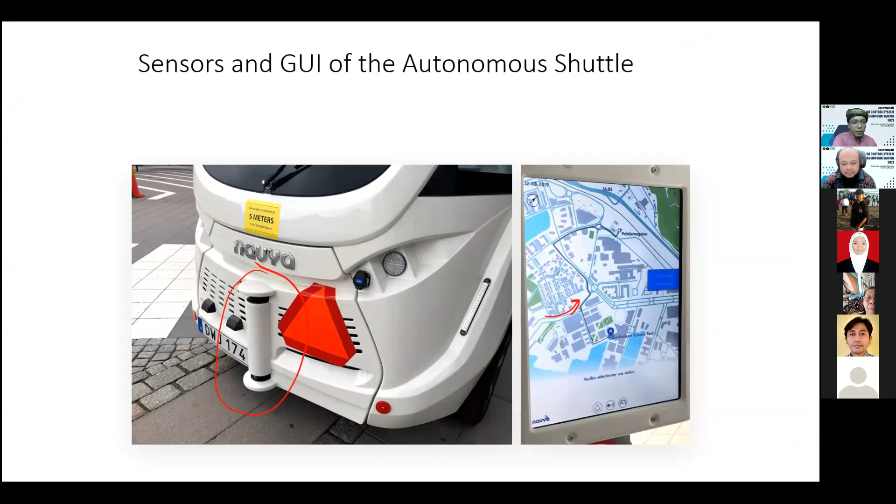Just a short one here, if not finished I'll continue in the last slot. Where we start is we try to develop talent development - this is the most important part. Students need to be equipped with correct fundamental knowledge. As lecturers we don't have much time, we only have very limited time to do this.

We are involved with a lot of things. We are involved in management things. So when we equip our students with the correct knowledge, if they are very passionate about this one, they can work from morning until night in the laboratory just to do some project that they are very

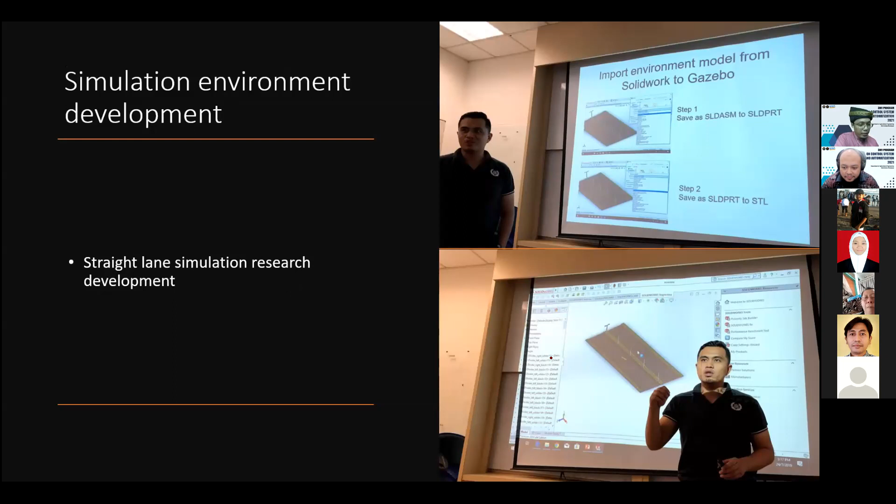passionate about. So what we do is we teach them some fundamental software, how to use the software, how to integrate, and we teach them how to do simulation. That's why in the hands-on, I give you some simulation tools to get familiar so that you can do some movements. For example, like here, we try to simulate what is happening on our roads. We use the simulation, and after that, we try to program the shuttle.

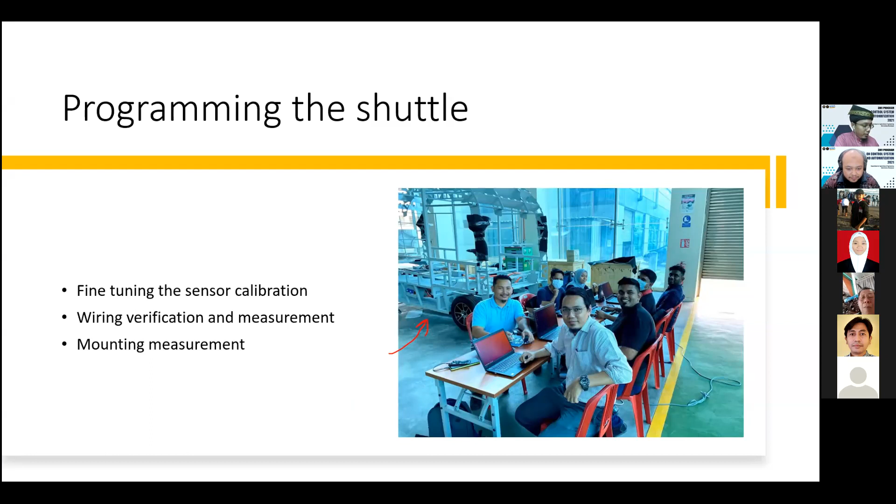So before, you can see on the back here, this is when we started with the frame development of our autonomous shuttle. When we start with this one, the frame will take some time to fabricate. Of course, you will have a lot of errors. So when we develop our simulation environment, we can do estimation, the simulation, we can simulate the measurement of our sensors. And this is some of the training we did.

Myself, I am not an expert in mechanical design, but there's a lot of mechanical design involved when we are developing this frame. So that's why when we develop the system, we need people from different expertise so that we develop a very good complex system. And if you see from this slide,

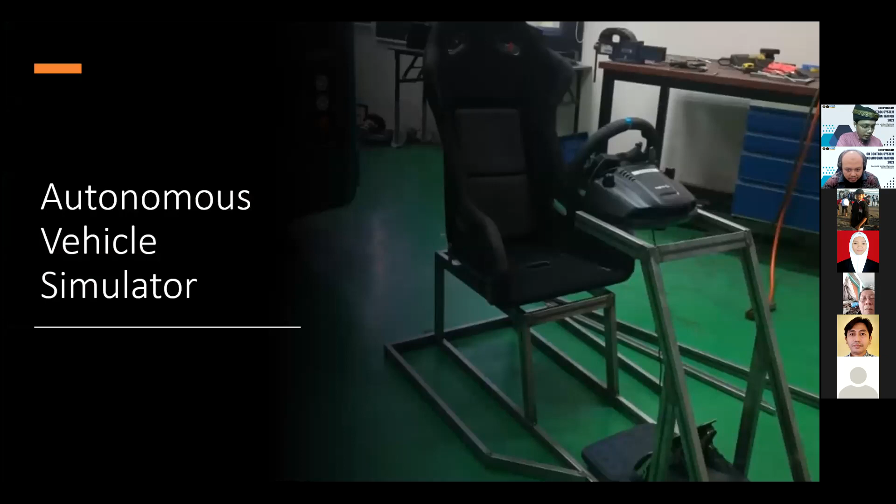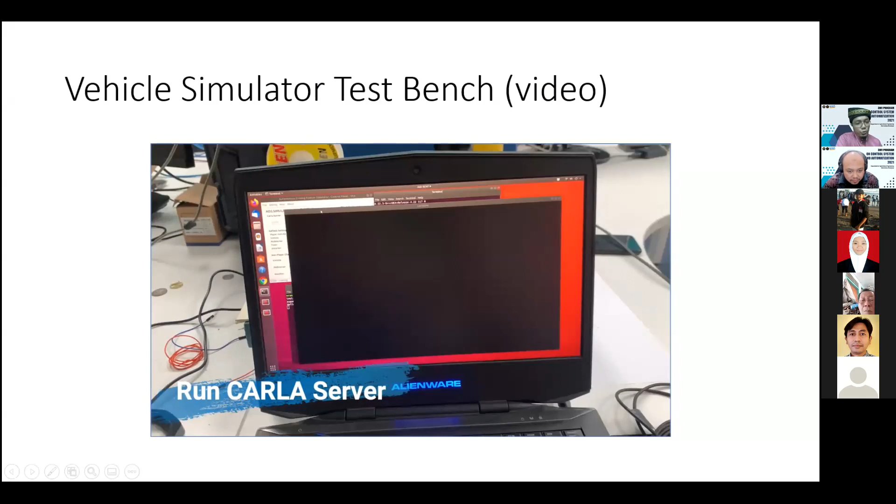And next, we do AV research. We have AV simulator. We have SLAM whereby we use mapping, LiDAR mapping. We have traffic sign classification and drive-by-wire inside this location. So here you can see that we develop our own simulator. So before we test on the actual system, we try to install our algorithm inside our simulator.

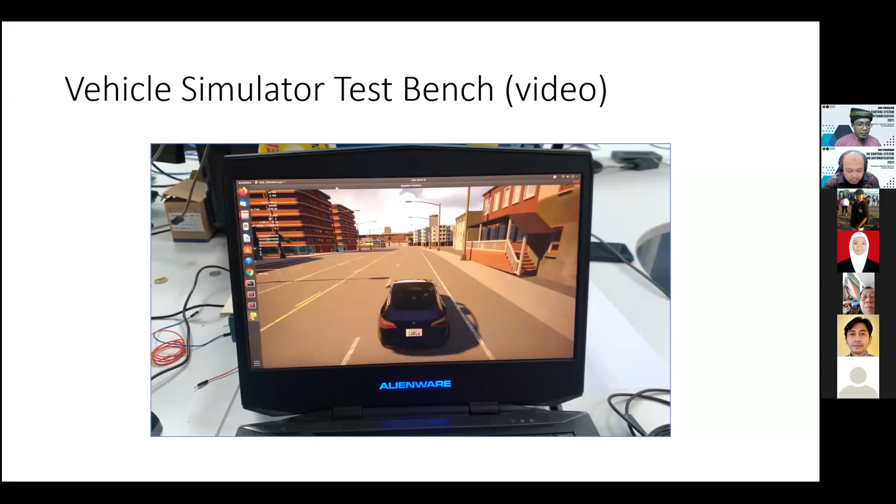So we have one steering using a gaming steering wheel, and we put it into our simulator. So this is our simulator. And then we load the actual environment, and we use a steering like a gaming simulator that you can see from here. So using the gaming simulator and our simulator, we can install the sensor and we can load the environment. For example, how many people you want inside your building.

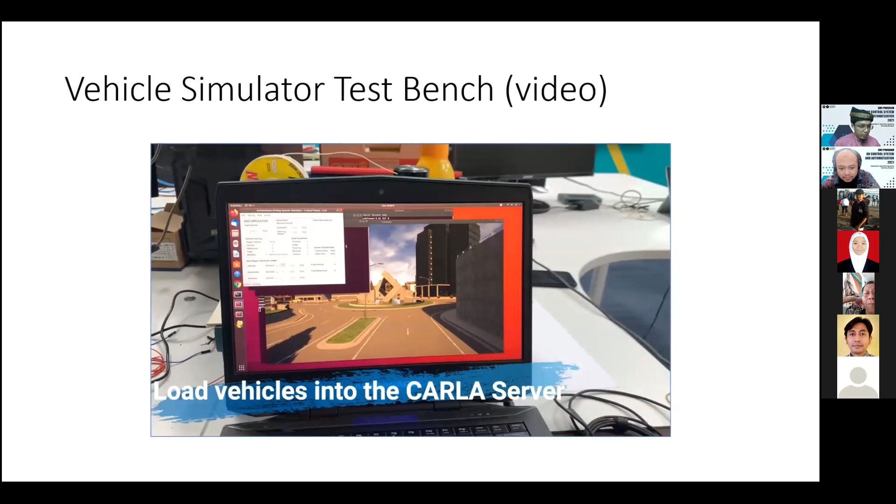And when we load, you can see that there is a car in front of the vehicle, and we can start to read the sensor reading. We can start the motion. So when we start the motion, we can do the image processing. We can do the scanning. So this scanning is going through our computer, and we log the data. And after we log our data, we can do offline processing.

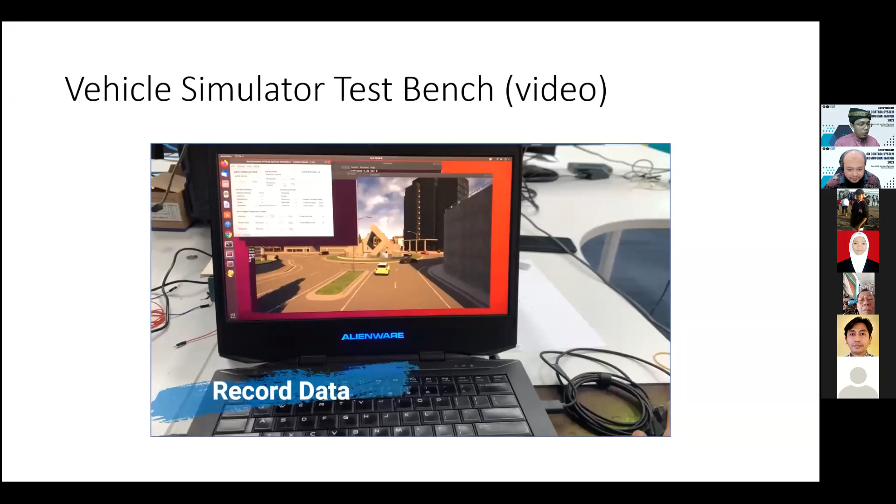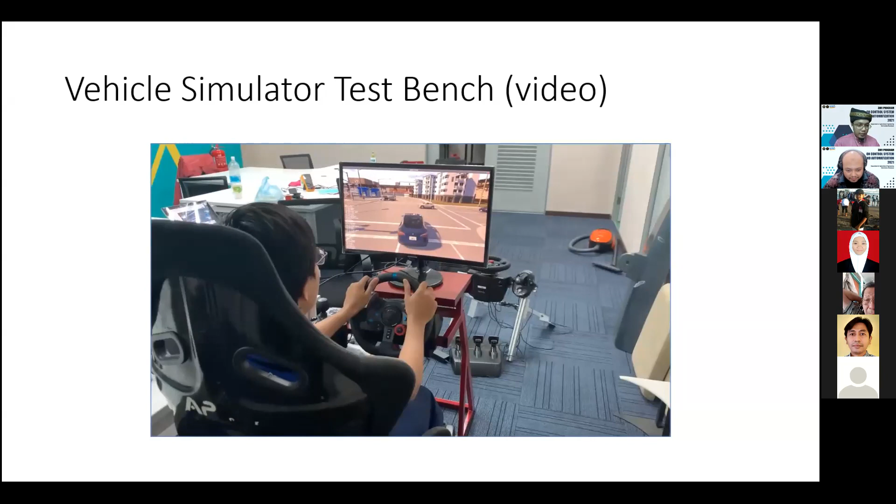For example, we can do LiDAR image processing kind of thing. We can use machine learning. So we record the data. So you can see from here, this is like a real environment. So this is testing inside our laboratory. And we have traffic sign classification.

Using an image camera. We install the image camera inside our vehicle, and whenever there is a traffic sign, we try to train the data. And they can recognize if there is any warning sign or some other signs, so this information is crucial, for example, at the intersection, because when we have this image, we know what the vehicle will be able to do. We need to stop it.

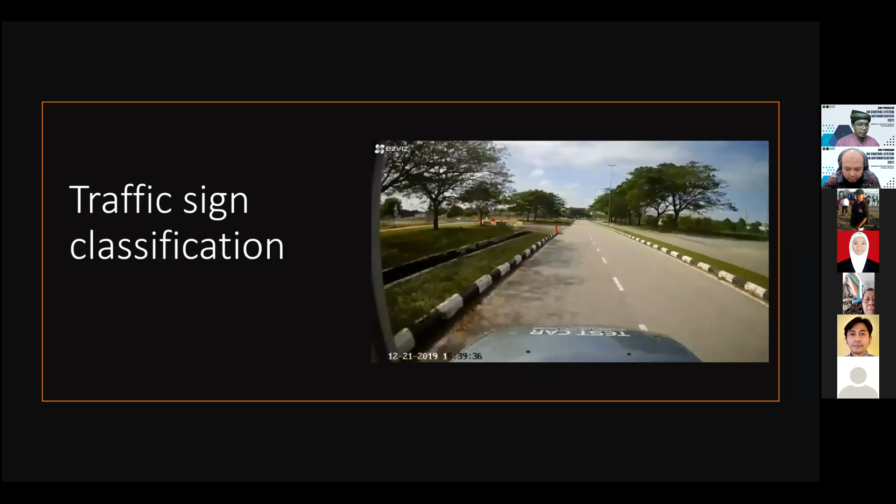For example, in your agriculture field, you need to put some signs so that your vehicle is able to know, okay, this is the checkpoint where I have to stop. For example, this is the speed limit. So if the vehicle gets the speed limit, it will slow down our autonomous vehicle. So this is how we do it using a camera, we do some offline processing, and we train using the machine learning technique. And maybe this is the last part before I continue with the next session.

And then we do lane tracking inside our campus to detect the border. This is just using image only. We don't use a LiDAR yet. I will show you in the next session how we use LiDAR. But here we can detect the curve. For example, in agriculture, you want to detect the border of your field, right? So we can use the image processing technique. So we eliminate the complexity of the LiDAR and reduce the cost.

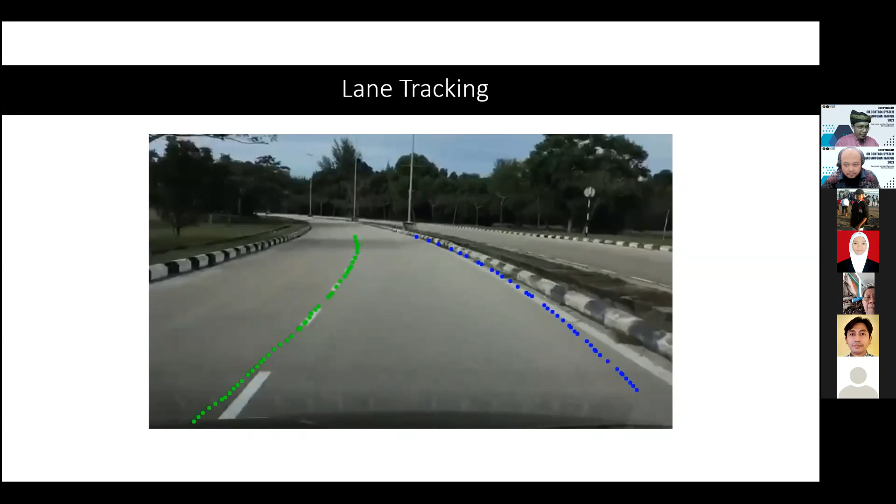So I think I will stop here. Actually, I have more things to share with you guys, maybe in the next session, in the detail of the project development. Because the time is running out, I pass back to Dr. Dimas. Yes, Dr. Aizzat, thank you very much. I could see a lot of work that you have done. And it is very interesting for us to learn from you.

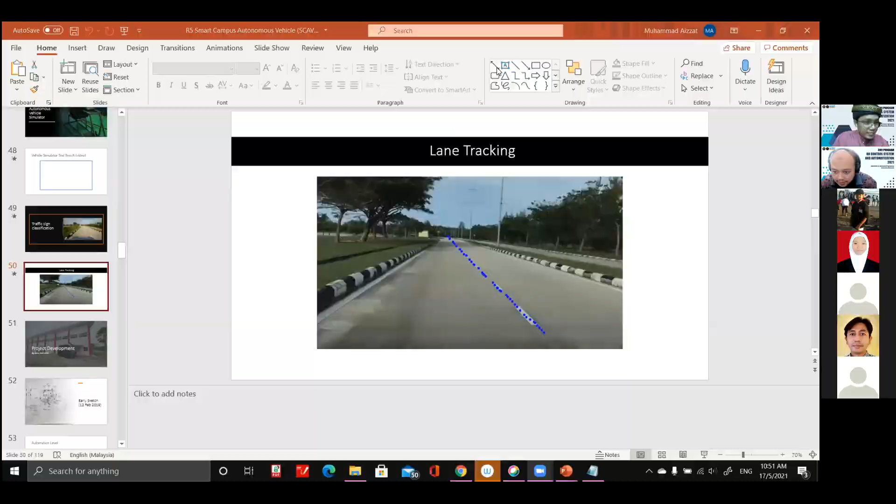Okay, is there any question from the audience, from the students, or any of the lecturers that joined this session? Any question? Don't be shy. Thank you. Okay, no problem. Welcome. From Mujarah Khotimah, maybe you could ask directly. Yeah, you can talk in Malay, in Indonesian if you want. Okay, it is quite a long question, so I can read it myself.

Kalman filter depends on the prediction model and error in the deviation. My question: would you like to share what is important to make a prediction model, especially the technique how to do it? Okay, so normally the Kalman filter depends on our model prediction. I will cover in the next slot the kinematics model of our Kalman filter and the state space model. Normally when we develop a motion model for our vehicle, we use these two things. Either you use a kinematic model to predict the motion of your vehicle, or you use a state space model. Normally the Kalman filter uses a linear model, which is the state space model, to estimate the movement of our model.